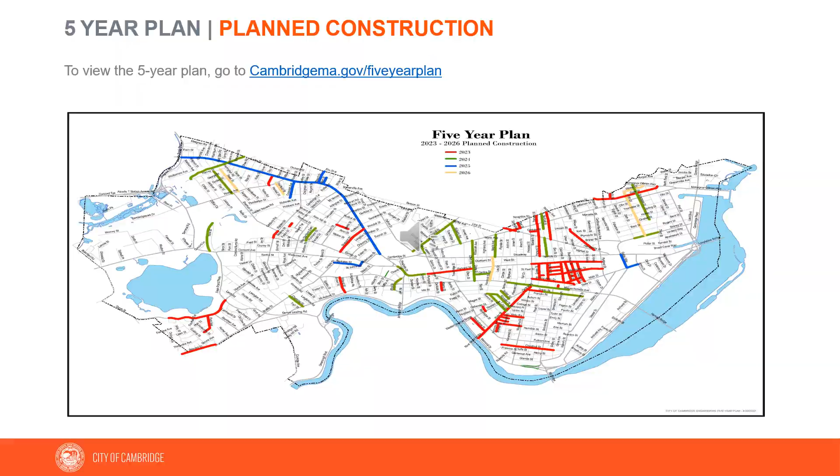This slide depicts the most recent map of planned construction under the 5-year plan. For more information on the 5-year plan, please go to cambridgema.gov/5-year-plan. The City Council adopted a Complete Streets policy in 2016.

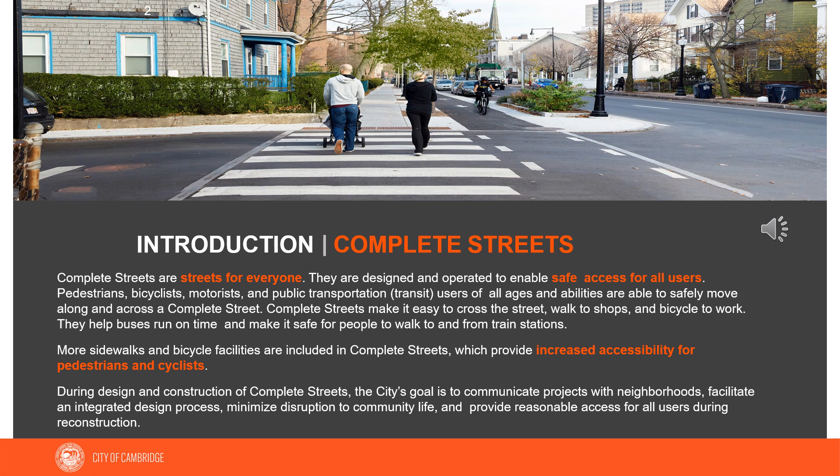Complete Streets is an approach to planning, designing, building, operating, and maintaining streets that enable safe access for all users who need them. Vision Zero is another important policy adopted by the City Council in 2016. Vision Zero recognizes people make mistakes, so policy and design should ensure that those mistakes do not result in fatalities. As part of this effort, the City of Cambridge has reduced speeds on most streets to 20 miles per hour.

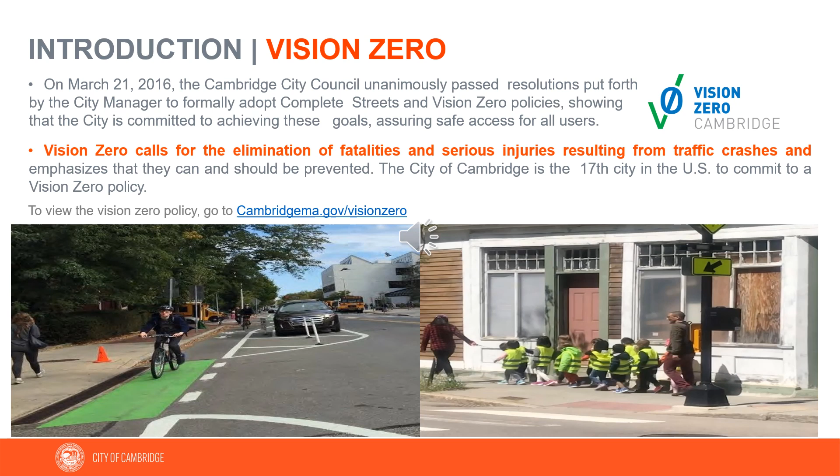For more information on the city's Vision Zero policy, please follow the link cambridgema.gov/visionzero. The elements shown on this slide are utilized by engineers, designers, and planners to achieve the goals of the policies adopted by the City Council.

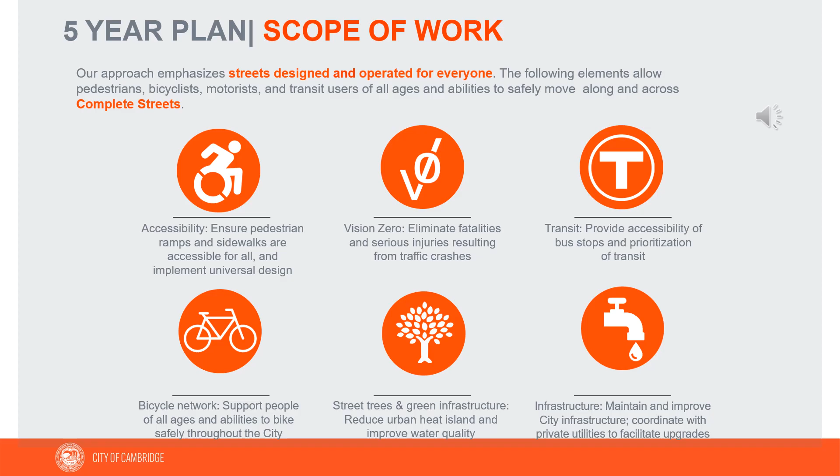The Cambridge Growth Policy and Vehicle Trip Reduction Ordinance places an emphasis on sustainable modes of transportation to promote livability, improve air quality, and reduce gas emissions. Bus stop designs must follow MBTA standards to ensure access to the bus by people of all abilities.

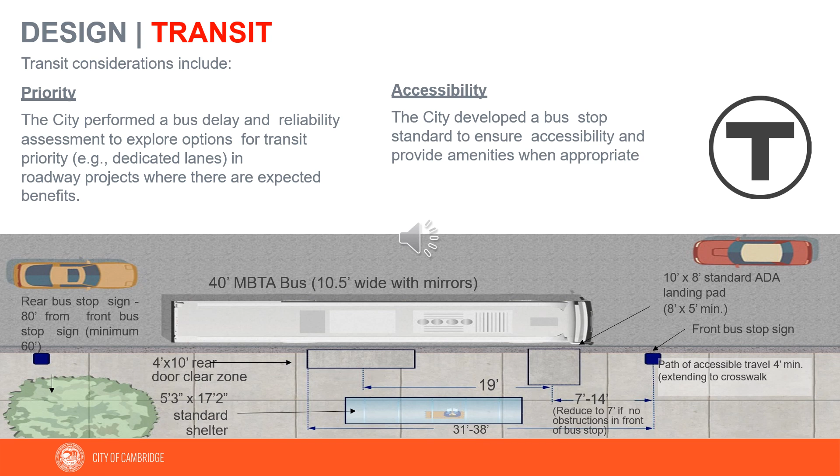The Cycling Safety Ordinance, or CSO, is intended to provide bicyclists of all ages a comfortable space to ride. Separated bike lanes have buffer space and physical barriers between the bike lanes, parked cars, and the moving cars. Bike use is growing rapidly in the city of Cambridge, and we are adapting our streets so that cyclists are as welcome as motor vehicles.

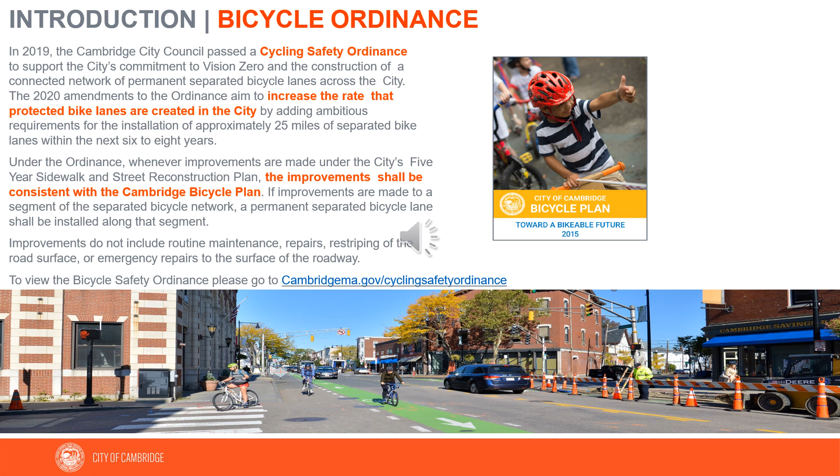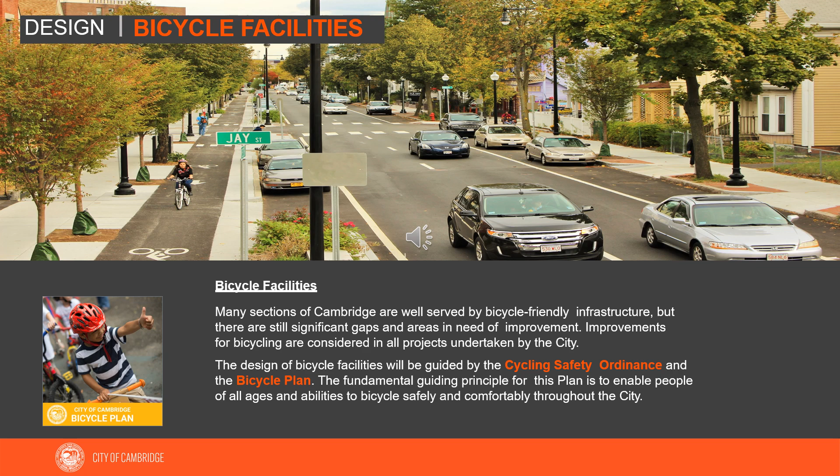For more information on the Cycling Safety Ordinance, please go to cambridgema.gov/cycling safety ordinance. The CSO directive, guided by the vision of the city's bicycle plan, informs roadway infrastructure projects in Cambridge. We strive to make the streets safe and comfortable for people of all ages and abilities.

All of these plans and policies provide a basis for our design process in a general sense. We then work with residents on detailed design options for specific projects, as each project is very different in terms of its opportunities and constraints. We take all this information, in addition to input from the community, and develop a scope of work for these improvements. How do these plans and policies translate to specific street and sidewalk designs?

Starting with accessibility. Why is accessibility so important? Number one, it's the law. Both federal and state regulations cover the construction of sidewalks and require newly constructed sidewalks to be accessible. And two, more importantly, it's the right thing to do. We want our sidewalks to be as inviting and usable as they can be for people of all ages and abilities, people using wheelchairs, walkers, or even pushing strollers.

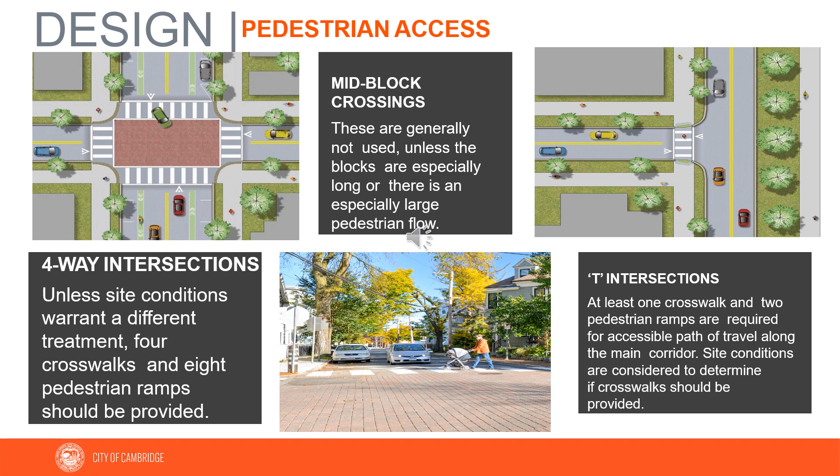As sidewalks are being redesigned, the team needs to identify and address existing deficiencies in the layout. Federal ADA regulations require that at existing pinch points such as street trees, hydrants, and utility poles, the city is required to provide 36 inches minimum compliant sidewalk between these fixtures and the back of the sidewalk. In locations where achieving this minimum clearance is not attainable, the city may be required to construct a new 48-inch compliant sidewalk around this obstruction. This is achieved by constructing a bump out around the obstruction and into the roadway.

Curb extensions have many benefits, including reducing crossing distance, improved accessibility, and preventing vehicles from parking within 20 feet of the intersection, all of which improves the visibility of both pedestrians and drivers.

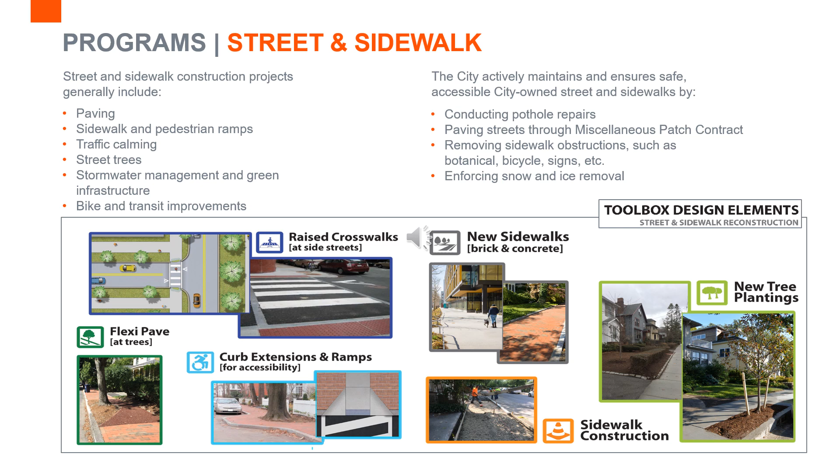The Cambridge Climate Plan and recently completed Urban Forest Master Plan document Cambridge's commitment to maintaining a healthy environment in the face of a changing climate. These plans include specific steps we can take to slow down climate change by lowering greenhouse gas emissions, and help us reduce impacts of climate change by, for example, providing increased tree canopy to reduce the impacts of increasing heat waves.

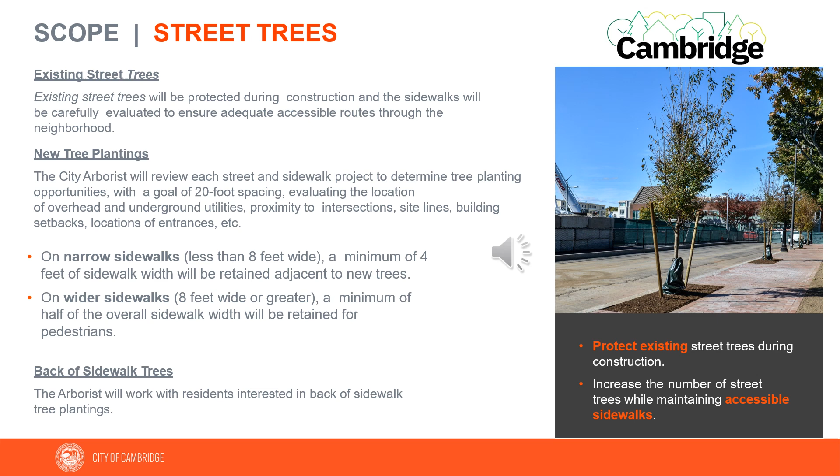Green infrastructure, or GI, is part of Cambridge's efforts to improve the quality of stormwater before it is discharged from local drainage systems into the Charles River or Alewife Brook. GI refers to a variety of techniques which use natural processes, such as specially selected plants and soils, to promote infiltration of stormwater into the ground or to remove pollutants such as phosphorus from stormwater.

The city has successfully implemented GI on a variety of roadway projects, ranging from major corridors like Western Ave to residential streets in West Cambridge. We are committed to incorporating these types of environmental improvements into small projects as conditions and space allow.

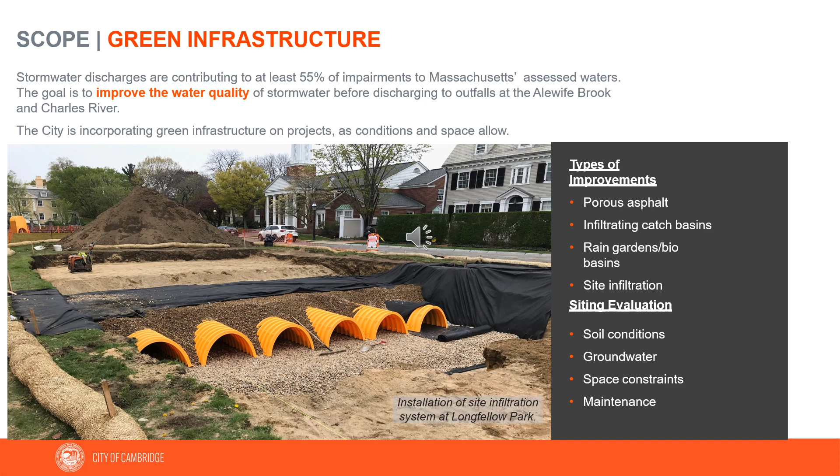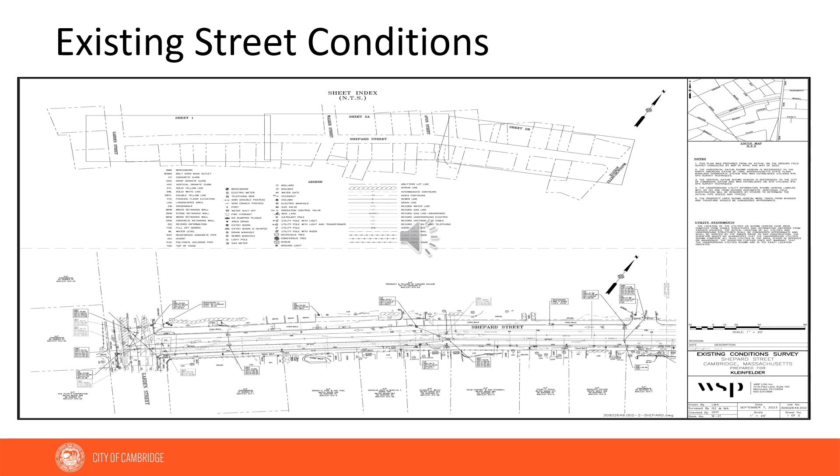The plan shown here is the existing condition survey plan and will be utilized as a starting point for design. It is important that residents who live along the street share their specific needs, concerns, observations, and feedback to the city to assist in addressing street-specific concerns of everyday users.

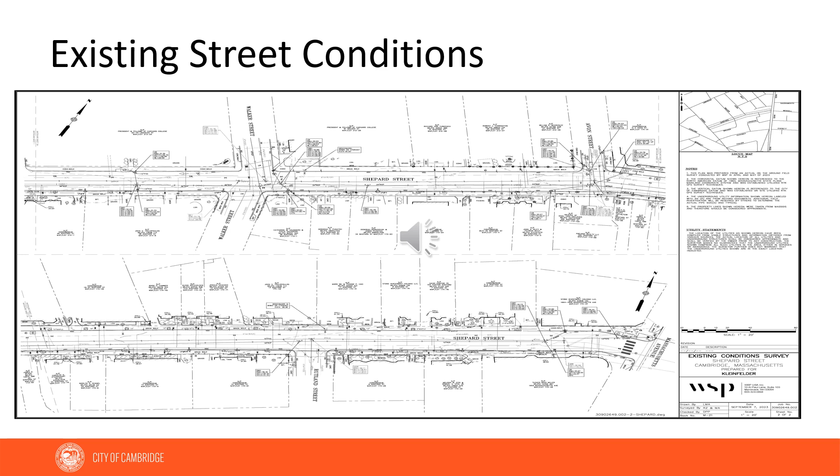We are starting a community process to gather ideas, information, and feedback. Please take this brief survey to tell us about your experience on Shepard Street. We will consider all feedback we receive, not just survey responses. To reach the survey, follow the link below at www.surveymonkey.com/r/Shepard Street. Now, this concludes this presentation.